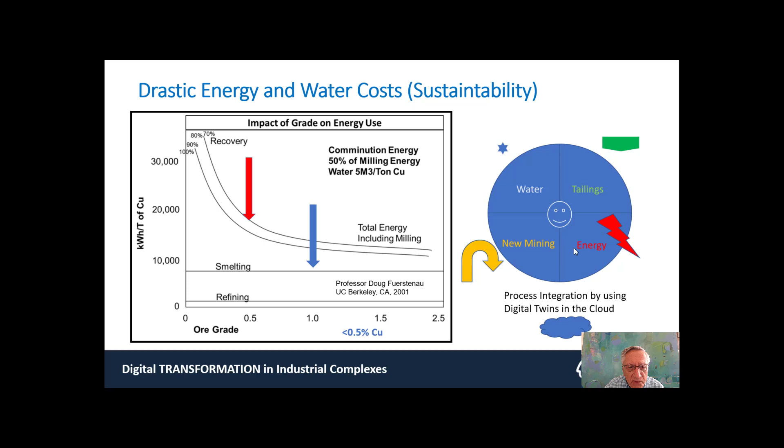We're using digital twins in the cloud. We're looking at the energy, water, how the tailings are affecting the plant, and how this needs to be reshaped by using these new tools that are becoming available.

We started very early working on this. This is me and Dr. Herbst in the 1980s, looking at how we are going to tackle these problems using the latest technologies. I was given the Antoine Gaudin Award in 2014, together with Dr. Herbst and Dr. Fuerstenau, who have been good partners in coaching me and looking at new ways of using the mineral processing theories and technologies.

Usually, we can start from the mining and the mill integration, but also we are going to include today the tailings, because we need the water to process these ores.

We can start looking at basically the grinding, which starts at the blast, and how when the shovel is loading the truck, we can start thinking that that's a good disturbance that can be minimized if there are some issues there, so we can proactively look on how we need to run the mill.

That's something that we have been working on, and this was implemented at ArcelorMittal in Quebec a few years ago with great success.

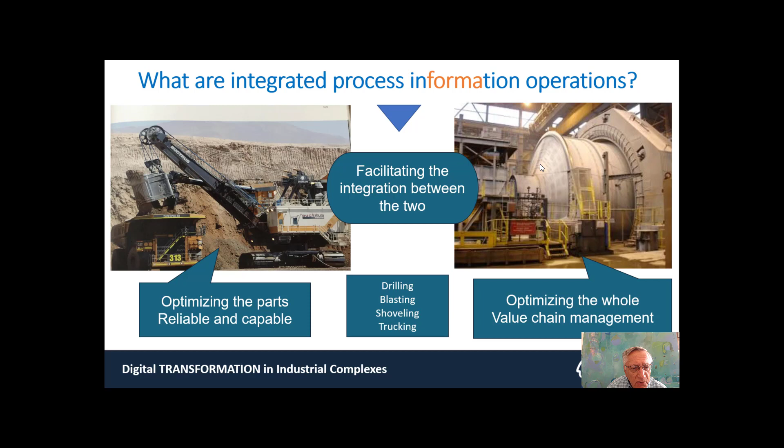One of the things that we find is that people are working in silos, not allowing them to use the tools together and to be able to have a good way of presenting that information that is being gathered from the processes into management.

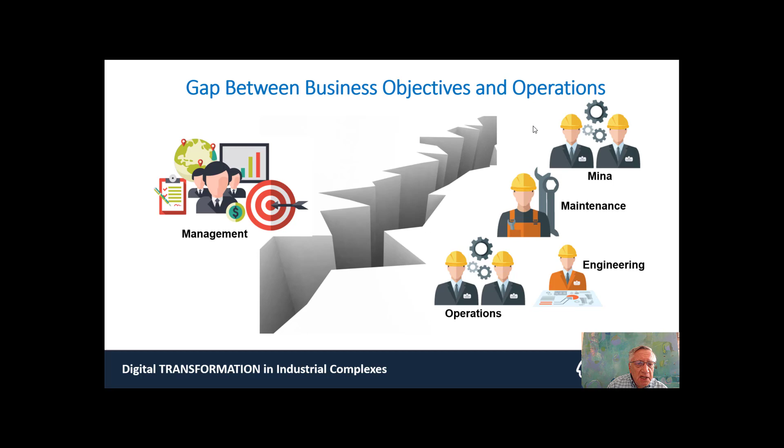So when this is solved by using the new tools, especially working in the cloud today, there is a lot of things that can be done that were never possible before. So I encourage you to look into that with more detail and have one way of doing that.

Too many silos, as we said, there are too many microcultures. Avoid the solution that we are going to be presenting today. So this is something that is not related to technologies, it's about how people need to be reorganized.

So there are too many versions of the truth. Sometimes we put this in spreadsheets and they are not doing anything because we just see what happened and we don't know how to tackle that in real time to avoid problems and to get out of the constraints that usually are being detected by the system.

Lack of information of true value for management. So this is where we need to develop ways to transform that data so we can use it and augment it using the aggregate models that we are going to be presenting.

Sometimes planning data is not considered in the operational data. And this is very practical so we can really assess if we are in the plan or we are not there.

The industrial plant is segregated from the enterprise operational support. So they decouple, and this operation and the decision support needs to be integrated, so we are all working with the same type of information.

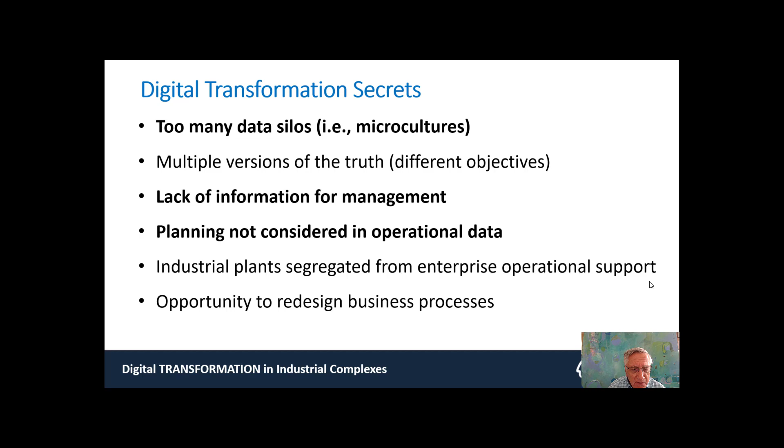It's very important, so this enables us to change or redesign the business processes, so operations, management, engineering, maintenance, and the mining are all working together.

So what is a digital twin? A digital twin is a computer representation of a physical integrated process, capturing in real time the time series data and events. Events is very important.

Those are the operating conditions in which each unit was operating, and we have to process the data into information, capable of simulating in parallel the behavior of the industrial plant, so we can understand what variables are affecting the rare KPIs, which are in this case the net metal production rate, the size distributions, the rheology or percent solids and viscosity, and how those are sometimes very large issues in today's low-grade ores processing.

And the plant is a set of unit objects which are communicating the information between each other to work in harmony, avoiding the constraints that might create major problems, so we can optimize if we are outside those constraints and minimize the variability of those, so we can push towards the constraint in the system.

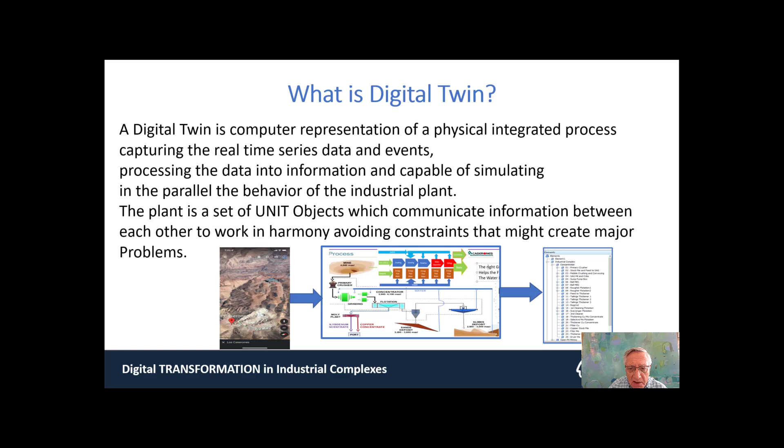So we take in mind here the processing plant, the tailing ponds, and we integrate that into a digital asset using this unit object, in an integrated perspective here, using the PI system from OSIsoft and now AVEVA.

So the digital twin in this case can be characterized by looking at the copper production in tons per hour, which is calculated by the tonnage, the grade, and the recovery. This tonnage is affected by the mineral, the rheology, the operation, the turbulence, and the water, and the assets availability, and the operating modes in which the comminution, the flotation, and thickening are operating.

The grade, of course, is coming from the mine, so that's where the cut-off grade and the management of the feed to the plant becomes very, very important. And the more we know about it, the better we can improve the processing of the low-grade ores.

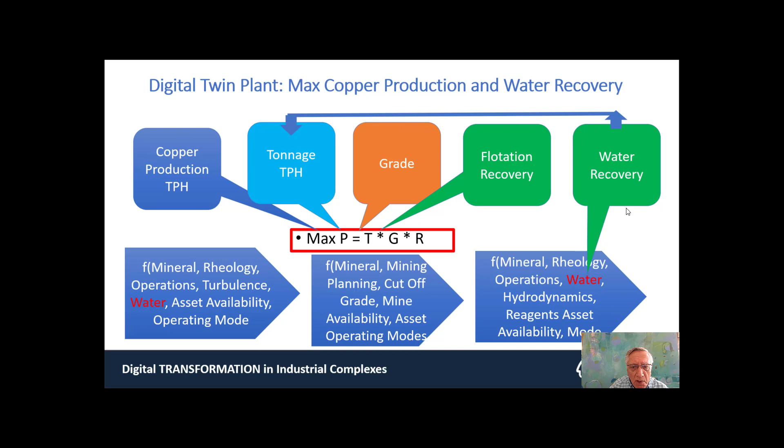The calculation of the recovery is very important, and also we need to have the water being recovered correctly, so we need to understand how we can recover more water. That's part of the discussion that we're going to have today.

If we look at the typical recovery curve, which is the green line here, and the throughput, there is an optimal throughput, an optimal recovery, and this too is related to this net metal production. So this is very important.

At the same time, we have found that sometimes we can push the mill more, but we lack water because we are doing something wrong on the process that is not enabling us to have the right amount of water available. So we have to cut down on the throughput because of not having the water. So we have to integrate that as part of the digital twin that we need to have to manage that correctly.

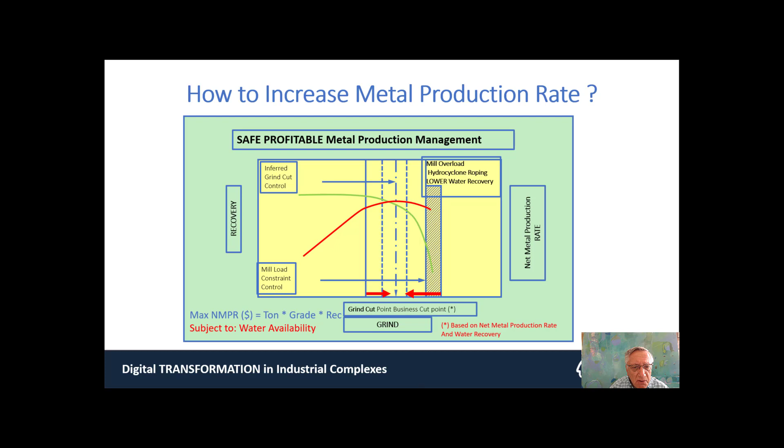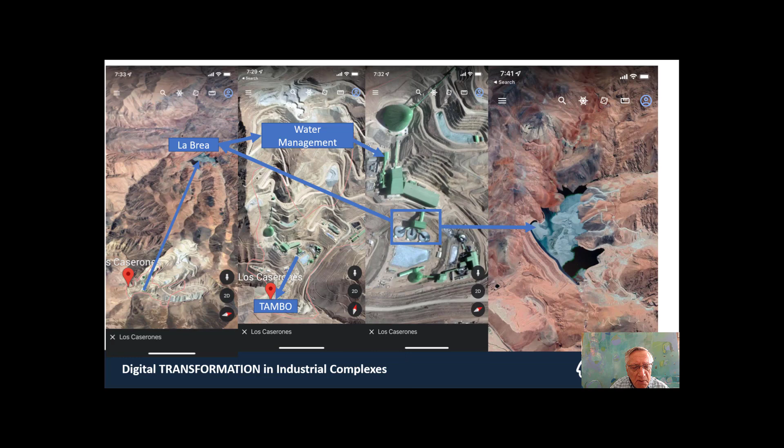That's why we take the overall perspective of the mine, the tailing ponds, the processing plants, and how that water, which is recovered from the coarse material and from fine material, goes back into the plant to have the right amount of water to be able to maximize the throughput and maximize the total copper production.

So by having this model of this unit-based environment that you are going to see, it enables us to maximize the way that we are grinding, the recovery in the flotation, and the water. They are all affecting each other as we go through, because the water comes back and we have that big feedback that is related to the thickeners and to the tailing ponds.

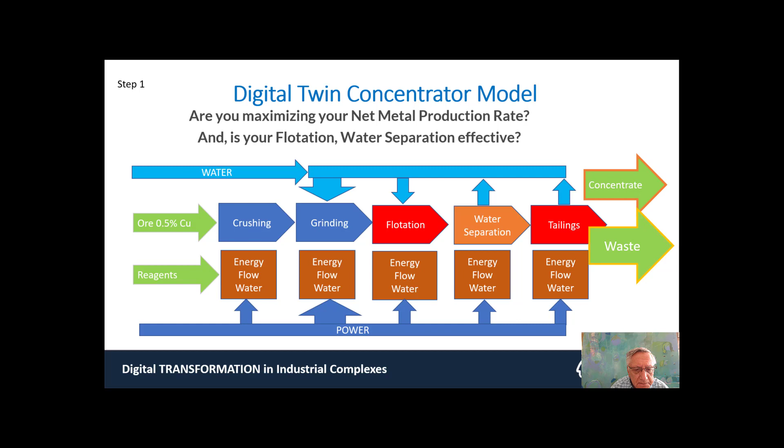So the data is something important here that we need to evaluate. It's dark data. If you have time series, they have to be processed correctly, sorting and cleansing, and adding the right context, so we have information to create the right analysis for continuous learning.

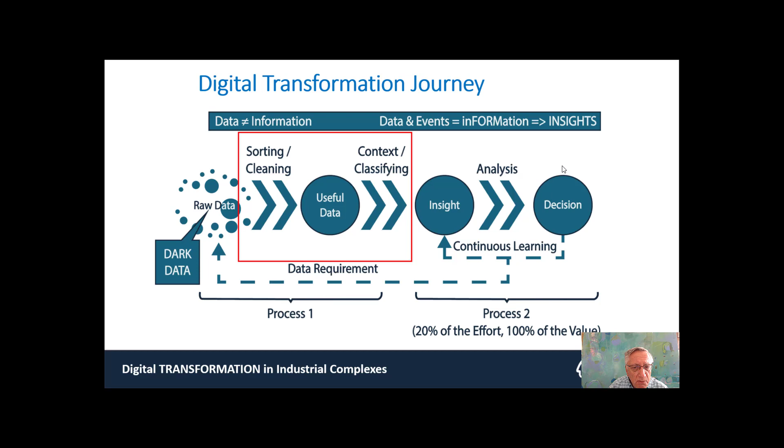And these systems are changing periodically, they are dynamically moving. When I present, for instance, a trend or a subset of the trend, usually we need to know how that data is being transformed into information.

So here we use Seeq tools which enable you to take that real-time data and transform it into analysis, which enables us to see what we have, develop the models, use the models that we have available, the mass balances, and so on, and be able to create dashboards which enable us to see where we are. I'm going to present a few of those as we go through. But having this analytical engine to tackle that real-time data and time series data is vital for implementing digital twin.

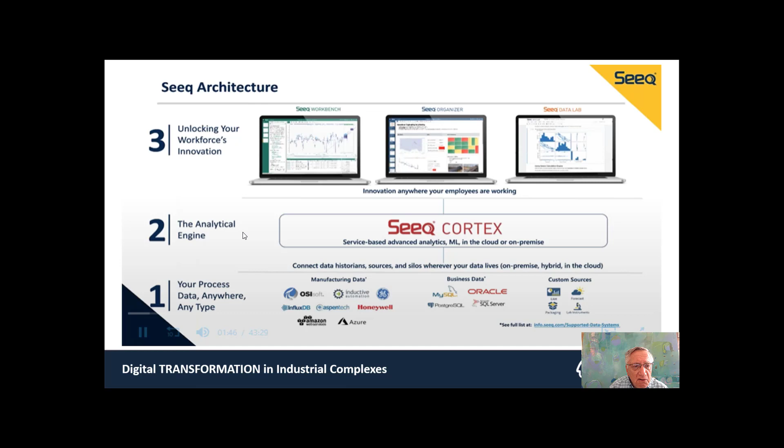So here we got the plant and we need to digitize it using this object. We got the rock processing at the front end of the plant, and then once we got the liberated mineral and concentrate, we can clean it. But the most important part is that we need to take the water out of the thickeners, take the water of the tailing pond, so we have enough water for efficient grinding here.

The rheology of the grinding is very important, and also the rheology of how the thickener is being handled and how the paste that is created in the sands and in the slimes are critical for having the amount of water necessary to manage correctly the grinding, flotation, and thickening.

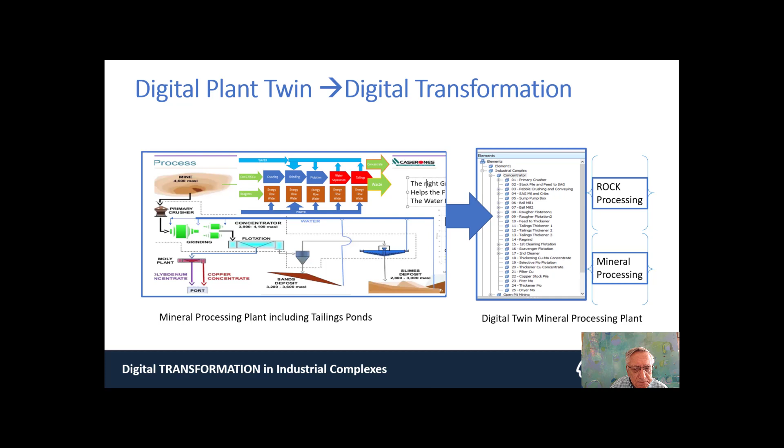So we need to build a data infrastructure that enables us to organize the data correctly so people can use it. They can identify the process unit constraints and be able to alert very early that those are not violated. Then we develop the predictive operational model using the dynamic models and the data, and identify and deploy the plant processes for optimization.

In a consistent way. So if we take the whole set, we have events which characterize the different processing effects which are connected with the process data. And those two need to be analyzed, specifically the operating conditions of each of the units.

So when we want to do a model, we take only the data that is in running mode and compare it to the one that was in trouble mode. So we know how much we can move towards the running mode, and what we need to do to avoid getting into a trouble time where we are not going to get the base production we're supposed to have.

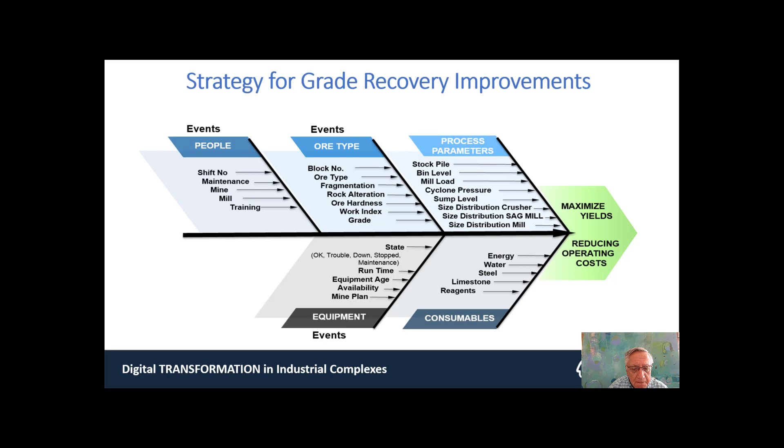So this is basically where you do the analysis of the constraints, and then you put the water, the electricity, and you identify where you are making losses. And that's where you start tackling and trying to understand how to move away from those by predicting ahead of time when those things are going to happen.

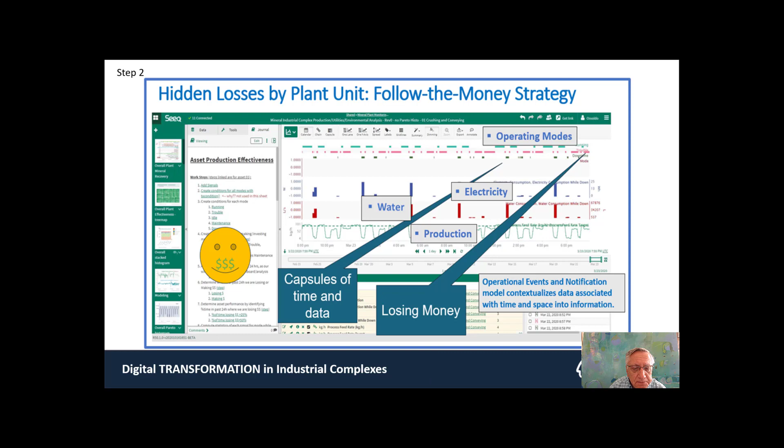The most important area of the plant that is usually constrained is the cyclones. So the cyclone must create an air core to be able to separate the coarse particles from the fines. So they need to have the right percent solids, or viscosity in essence.

This has been very well understood early on by Professor Lynch and Rao, who developed the first model which has been reused, and we have implemented better ways. Professor Muller has also done a lot of work on that, so we are incorporating some of those things into the real-time augmenting of the cyclone data using real-time data.

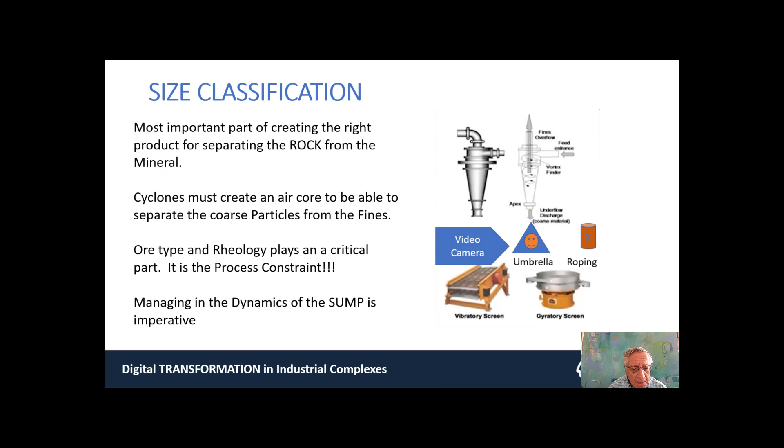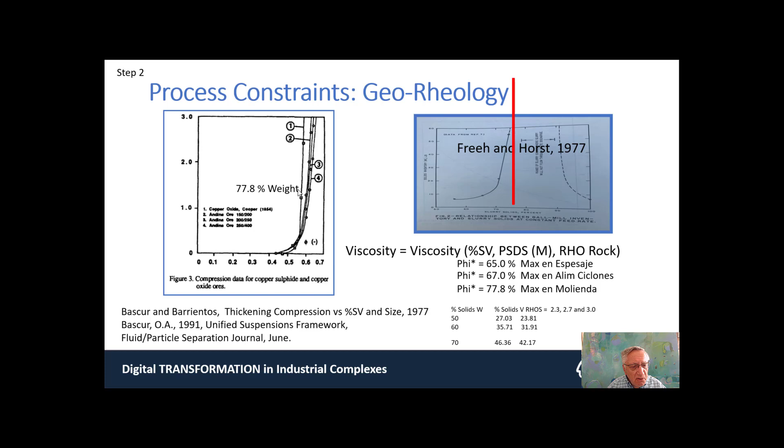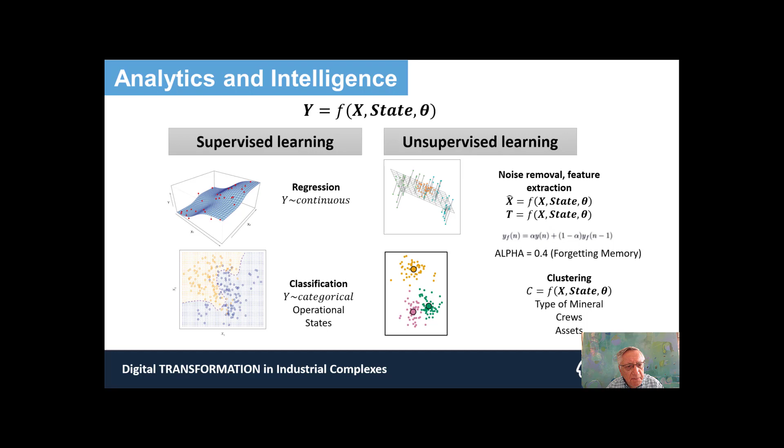And the same for the product: everything that we are grinding here goes to the thickening, so whatever the ball mills are doing here goes to the thickening. By having the right size distribution, which is what we are modeling here with this D max, the Gaudin-Schuhmann size distribution, we take those size distributions, process them, put them into the models so we know where and what to do, where to add the water, how much to add, so we have the size distribution we need for the best flotation and the best thickening.

This is the model that is predicting the particle size distribution, as you can see here, and we model it so we understand what are the manipulated variables affecting the size distribution. That's key to being able to maximize the recovery and to maximize the recovery of water.

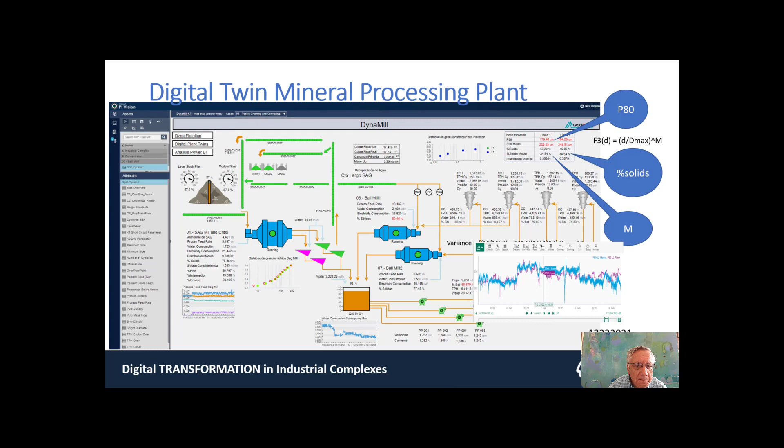These are some of the variables just for you to have a feel of the data: the virtual sensor, which is the augmented size distribution, the target variables that we are managing, and then the control variables, which are the ones that we want to have in a closed loop. These are the ones that will affect the size distribution and percent solid.

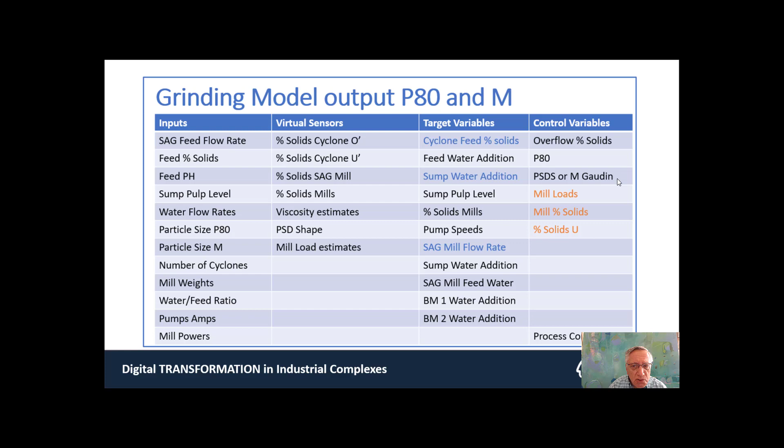The flotation work comes from what we did at the University of Utah in collaboration with UC Berkeley. We have this dynamic float model which characterizes the pulp and the froth correctly, so we can manage that and understand the best air flow rates and levels needed in the bank. I'll show that in more detail.

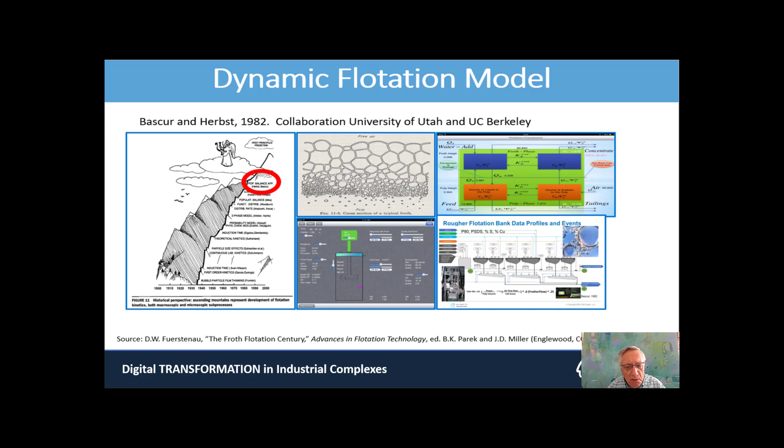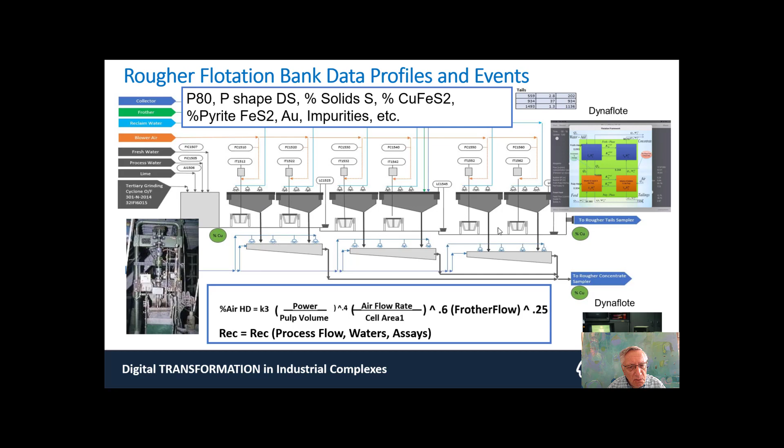So we are managing the turbulence correctly, managing the velocity and the froth to come up with the right KPIs for flotation. When we do the mass balance, we can see the best combination of these variables in the flotation bank, as you'll see here — the best combination of possibilities to maximize the amount of copper coming out from this rougher flotation.

The tail that goes here goes to the thickener. So basically, whatever we are grinding goes through flotation and then to the thickener. That's why we need to maximize throughput in the mill by maintaining the right rheology and getting the right size distribution, so we can maximize the amount of copper.

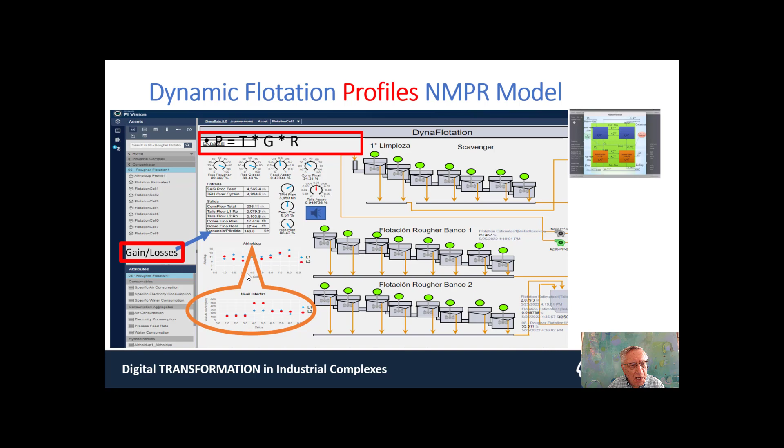This is a model generated using the Seeq and the analysis. It's all clean data, classified data, clustered data, and we use the flotation model with the variables generated here to model this. We have a function that can be understood, so we can see the effects of the different variables for the type of ore we are dealing with, and what we need to move or maintain to really assess the profitability of the plant.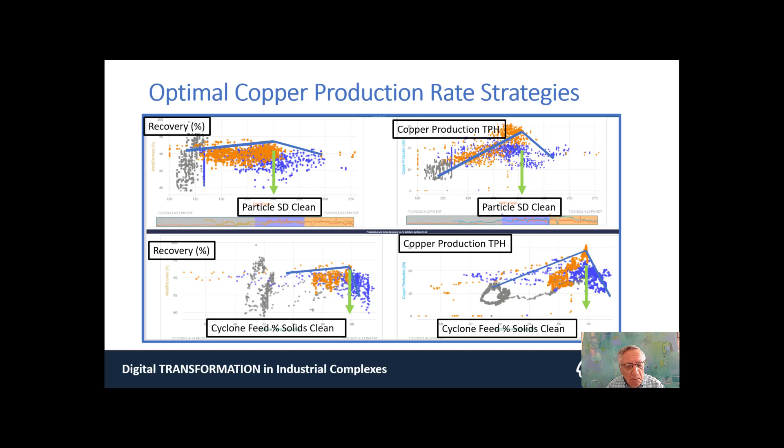It's very easy to see with these graphs used by Seeq — it enables you to clearly identify what particle size we need now, what percent solid we need now, and by plotting this in real time you can assess it, model it, and move towards maximum copper production.

Now what we have found is that when we push the material here, we need more water to get efficient grinding. So we have to understand how the thickening is happening and how the tailings are reporting back the water we need here, because we don't have enough makeup water in these plants. They lack water, so we need to augment as much as possible the recovery of water.

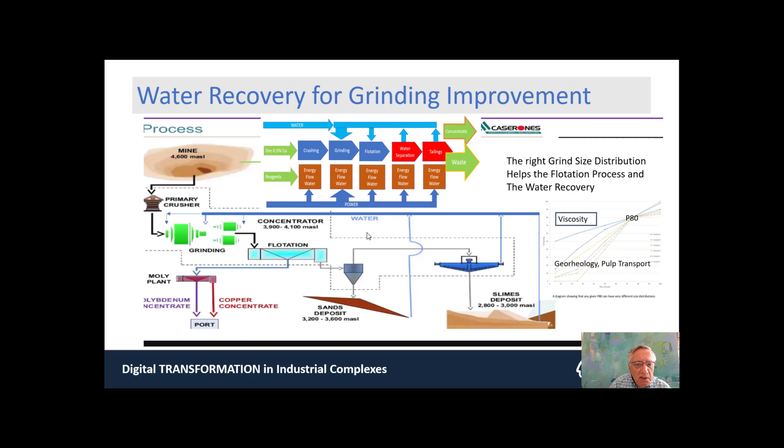This is a real-time assessment — you can see all these units are running correctly, because here we have the different operating conditions, and that's why we are developing the model. We are tracking very carefully the size distribution from input to output, and seeing the effect of the size distribution both in flotation and in thickening.

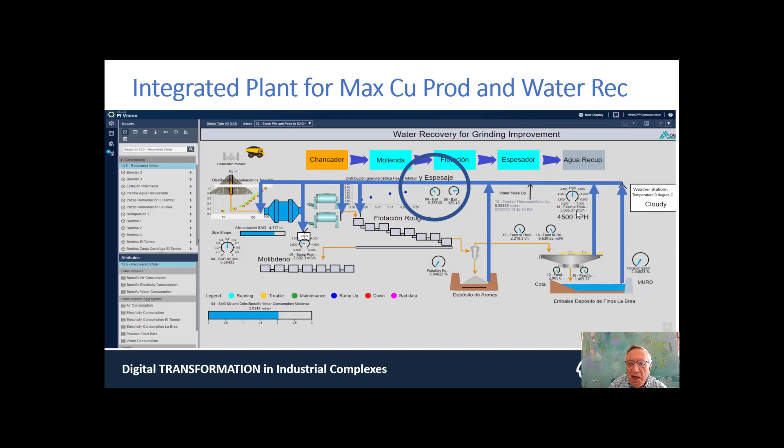As you can see here, when we started, the typical number was 4,500 tons per hour. Now they're running, in this case, 5,000 tons per hour, and as we learn more we are running higher solids, which is a very important result, because now we've got about 6,000 tons per hour of recovered water just from the thickeners.

Now we are going to look at how this pulp has been handled from the tailings. We are recovering a little more water from the tailing pond of the fines. This model started being developed very early on with John Herbst and myself while working at Chino Mines.

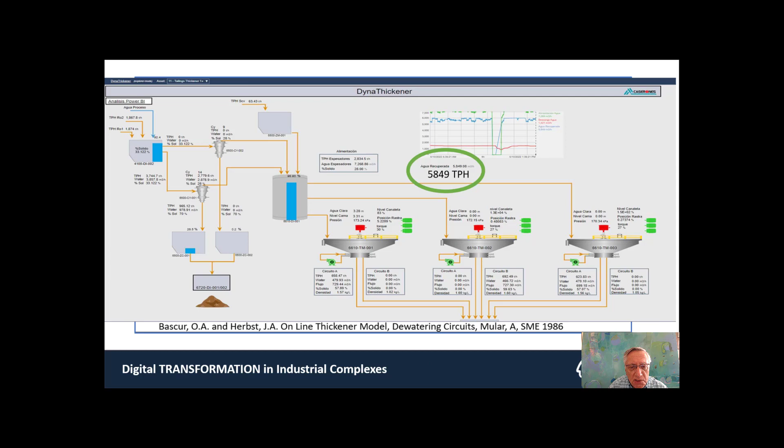We are trying to maximize the metal production of low-grade ores, which requires maximizing water production. We need a steady throughput that allows maximizing rougher flotation and water recovery from the tailing effluents. It's a big challenge due to the complexity of the process and the variability of the grinding operation.

We use the PI system with hybrid phenomenological models, DynaMill, Dynaflote, DynaThick, that help us augment the data using information and characterize the behavior of these units, all together through this digital twin. Seeq enables us to quantify the hidden losses of the different operating modes for all the units of the plant, and develop predictive models of net metal production rate, particle size distribution, water recovery, and so on.

DynaMill models the grinding classification very carefully, based on the model developed over the years. The new data workflows allow engineers and operators to reevaluate the grinding and water operation, fostering cooperation in harmony rather than silos. This is work in progress, and it's very interesting because people need to realize what's really happening.

The results are that recovery improvement has been 4%, and the water improvement has been at least 1,500 tons per hour, which allows for higher feed rate worth several millions of dollars.

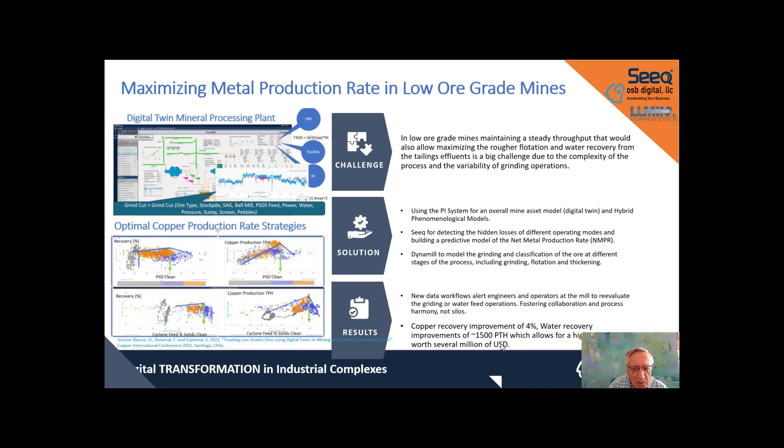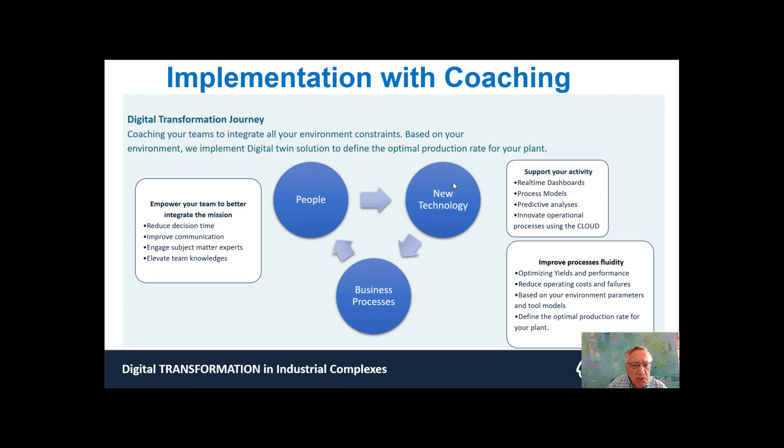This has been done through coaching, and this coaching enabled us to really get the people correctly using the new technology and adopting new business processes for implementing this in reality.

The typical architecture here is that we have the plant, we have the control system, that goes to the PI system, and we put this data model in, which using the advanced analytics of Seeq enables us to calculate the predicted process mill rate, process constraints, and metal production, and put that in the decision support for better planning and better decision making, defining the set points, targets and commands to have these tangible benefits.

These benefits include metal production, which is the most important one, water recovery optimization, lost time analysis, identifying which areas require more or less maintenance, predictive equipment analysis, and overall production effectiveness, which is how fast and how hard you push everything while taking care of the equipment.

Environmental compliance has improved tremendously because we have the data and information to tell government regulators what is going on in the plant and manage energy and water much better, because we know what we need to do to avoid the constraints, which usually cause the losses of water and energy from the production waste.

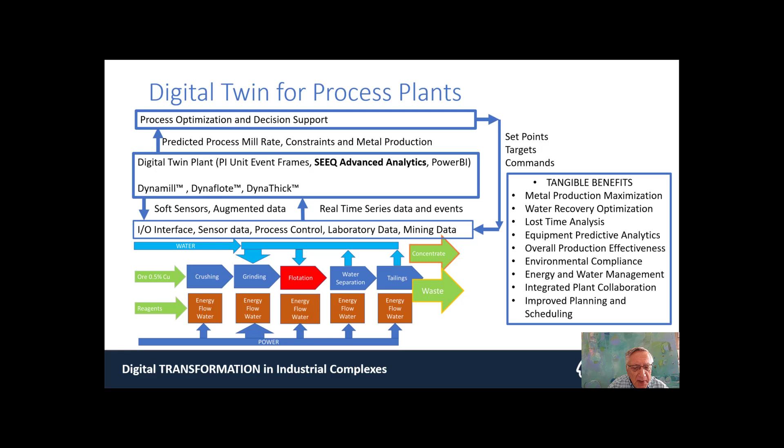Integrated plant collaboration is vital, and of course improved planning and scheduling is what enables managing the whole mill correctly. The digital twin plant model uses the data that is transformed into information by users at the desired degree of detail.

The users need to understand, and this has been very challenging, but little by little they are retraining and helping each other, and that's very nice to see.

We use hybrid dynamic process models to increase the visibility of the unknown, Seeq advanced analytics to offer dynamic decision support for the mining complexes by cleaning and identifying the minimums and maximums, identifying what is optimal, and defining real-time models that predict and assess the manipulated variables, which become available to see their influence.

PI system and Seeq synergy: this is very important to develop the PI system for Seeq connectivity so we can use it in a very practical way by as many people as possible.

So people really need a big cultural change, which requires new business processes to be implemented by management. And the use of technologies is where people have to get new skills to run and manage them.

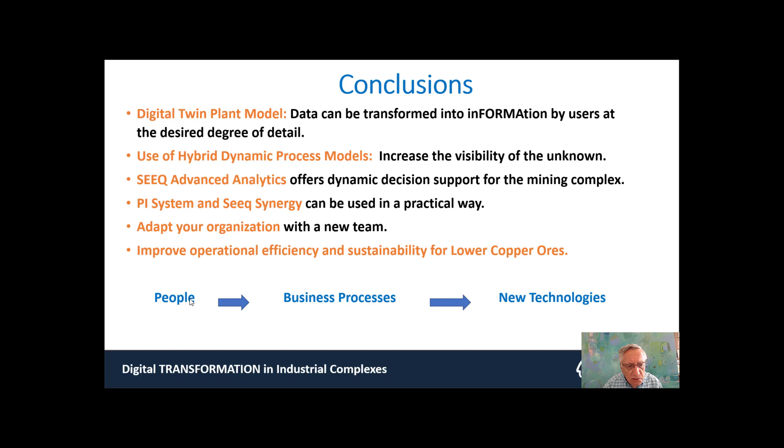This is a long-term project that needs to be started as soon as possible, because this is the way to really manage low-grade ores in our processing.